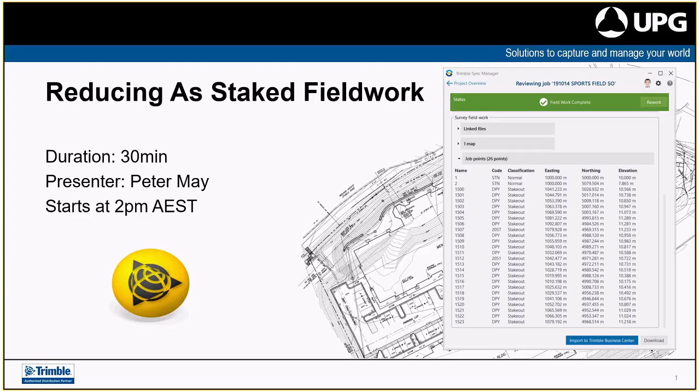So what I'll do is bring TBC up and then TSM on top of it. This is our survey or design data that we were to use to go and set out some sports fields.

I'll turn the surface off. So there's our sports fields. We're asked to go and set out the corners to about 25-30 mil, so we're placing dumpy stakes just to show where the corner should be for some line markings.

At the same time, we did a little bit of a rough design stakeout to see how everything would present when we bring it back into TBC.

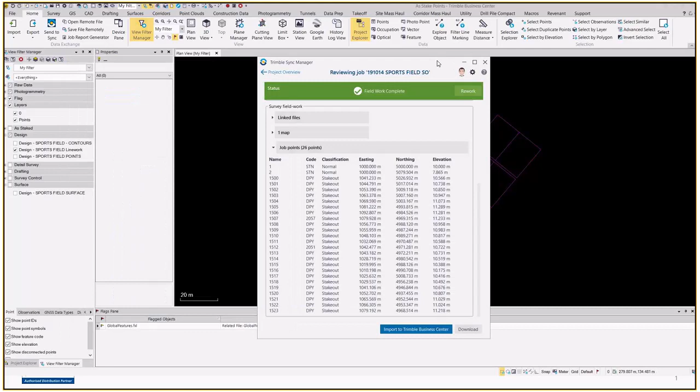So when you look at TSM, you have the ability to view your data, and this is what's presenting here - the link files, and if I scroll up, we have the job file, created on the 7th of November, with today's date as the date last modified.

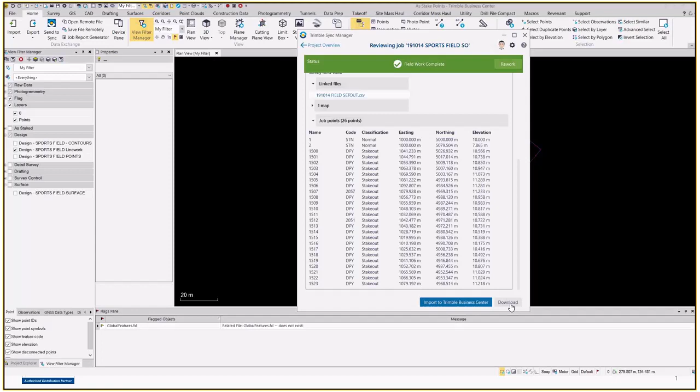What we're going to do is download the data from this and store it as a JXL, then drag and drop it into TBC, or in this case, you can just import straight to TBC from TSM.

So we're going to go ahead and do that, and a notification will come up in TBC asking what you'd like to do - would you like to import it, yes or no. We're going to go ahead and import the data into TBC.

So a standard request screen, or projection definition, will come up to provide some information on whether you want it on scale factor - for instance, if you just want it on ground scale factor, or if there's a grid scale factor you're working on for the project, this is a place where you can edit it.

This information is pulled from the .job or .jxl when the file is imported, so you can edit it now and it'll be stored against your JXL, or just leave it as is - that's what we used from the field.

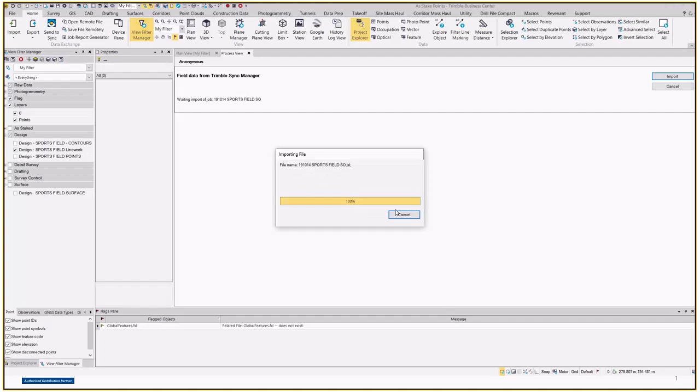So I click OK, import the data, and you'll see that it shows it's finished. We close this process view, and we'll see that we have a whole bunch of new points that have arrived on the screen. A red, or orange, flag is an as-staked point, and the as-staked points are shown up in your Project Explorer.

So it's not classed as a point; it has its own definition as being an as-staked point. These are the points that we set out, and then underneath each one of these is obviously the vector information from the total station.

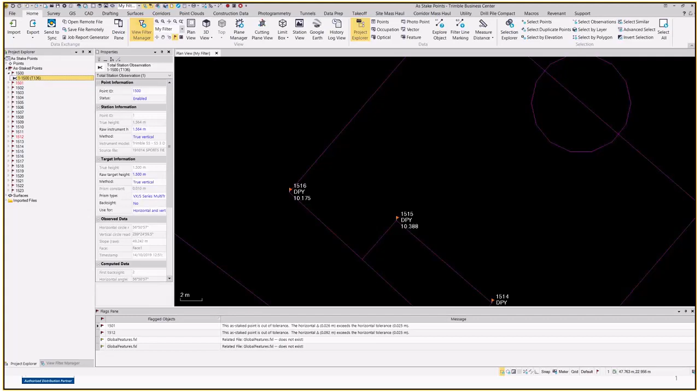For the process of this, I have turned off most of the other views and raw data information. So if I turn on total station, I've turned off all the total station observations, so we don't really need them.

Now, down the bottom of the screen, we have our flag pane. It can be found in the bottom right hand corner. You can turn it on and off. This will show you certain errors, and these are based against the settings that you set in your project settings.

In this case, we previously set a 25mm horizontal tolerance for all points and as-staked points when it came in. There's two that sit outside that: one that's at 282mm, obviously a blunder, and then one at 26, which is obviously a little bit rough.

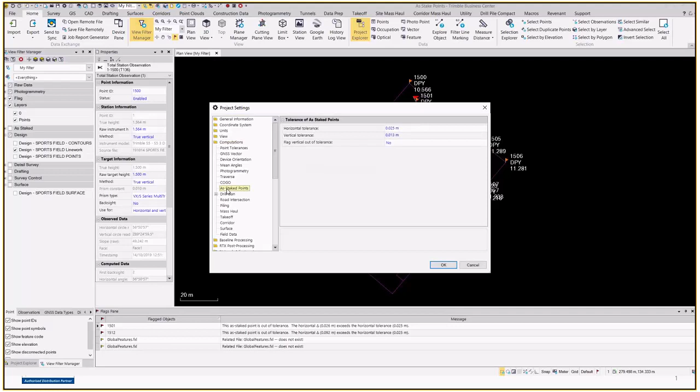So I'll just show you where you go. On your quick access toolbar, up in the top left-hand corner, we're going to go to project settings, and we are going to have a look at computations, as-staked points, and this will be where you find your tolerances.

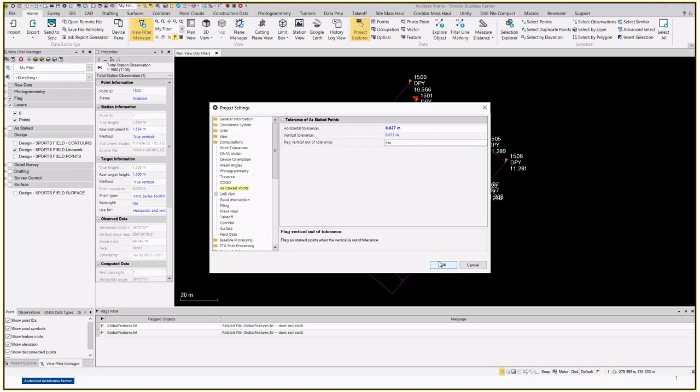So we can blow this out, say 27mm in this case. Do we want to test it against the vertical? No, we don't, because the verticals are all wayward. I made sure that they were all a bit iffy, just so I could show you something else in one of the next steps. If you click OK, that other point has now disappeared.

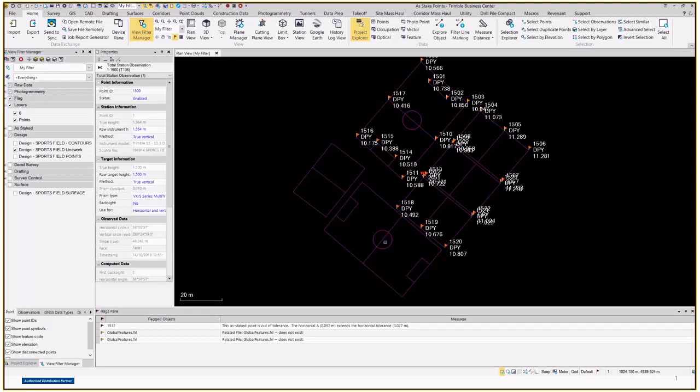The flag's disappeared, and there's still one that's there. So that's the flags. Now, when data gets brought into TBC straight from a JXL, the points are actually stored in the points layer. So if I isolate your layers and then go to points, you'll see that all these points have just been imported, and they're just sitting here under points.

Now, horses for courses and how people want to do this. Some people prefer to keep them in there. Some people like to segregate them out and throw them somewhere else. I myself love to keep things in different layers related to different days, so that I know when it was done and who did it.

So I'm actually going to go through and rename and relayer all those objects. And recently I found a really nifty little command in TBC which will allow me to do that in one swift hit, and it's called relayer objects.

Now you can, if you wanted to, select all those objects and go through and change them in your properties under points, vice versa, but this new command allows me to create a shortcut to do it in one easy swift hit, and you can do it to multiple things and vice versa.

One way to find it, and for those who weren't at this morning's session about data prep, you're able to find this through your command pane. Now the command pane is located in your quick access toolbar, or if you wanted to, you can press F12 and that'll bring up the command pane.

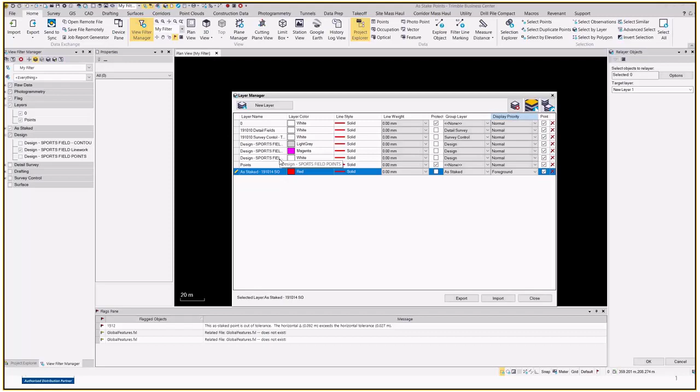You can set priority and how it's to be displayed on the screen in relation to all the other data that's presented. So in this case, I want this to be in the foreground because it'll be up against some other set out information or some other design information when we look at that later on.

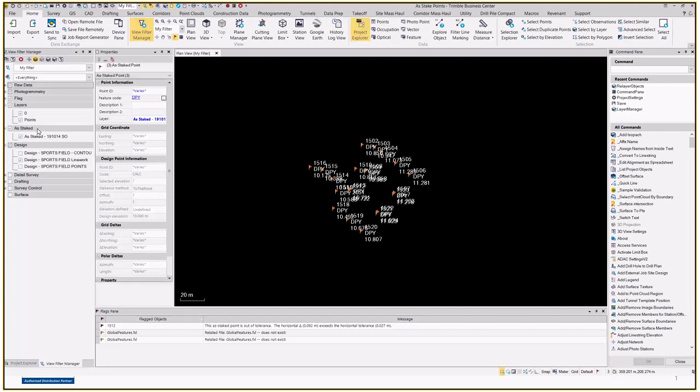Okay, so there's my layer, it's good to go. What I'm going to do is select a couple of points for this exercise, just a couple up in the top left-hand corner, so 3 objects, and I'll click OK. Now it's thrown those into a brand new layer, as staked here, where I've created those 3.

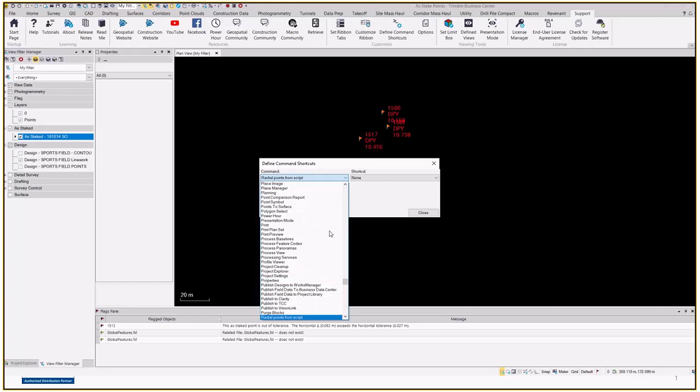Now I can go back through, type that command back in to relayer, or go to recent commands and go through that, or I can create a shortcut. I'll show you how to do that quickly. Quick shortcut, define commands, and we're going to look quickly for relayer objects, relayer objects, and then we can assign a shortcut to it.

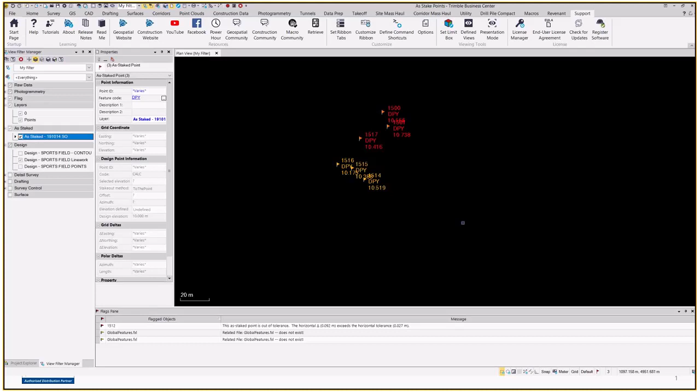In this case, I've created Control L as my shortcut. So if I go back to my points, just a quick note, if you use this command again straight after using it, it will actually hold that layer you preset before. So if I select 3 points again and go Control L, it'll automatically throw those 3 points into that layer, making it nice and easy to get around. So it's something you can use not just for this, but for other things as well.

I just thought I'd throw that in there for today's little exercise. So I'll just throw all this stuff into the one layer, and there it is. Everything's now in as staked from today. All right, so there's our data.

We now want to go and have a look and see how good our surveyor actually was, or how good I was when I did the survey. So we'll want to look at this as a report form. You can go into a couple of other spaces and look at some data if you wanted to go through Total Station Editor and look at the observations stored, but it's actually much easier to go through your reports.

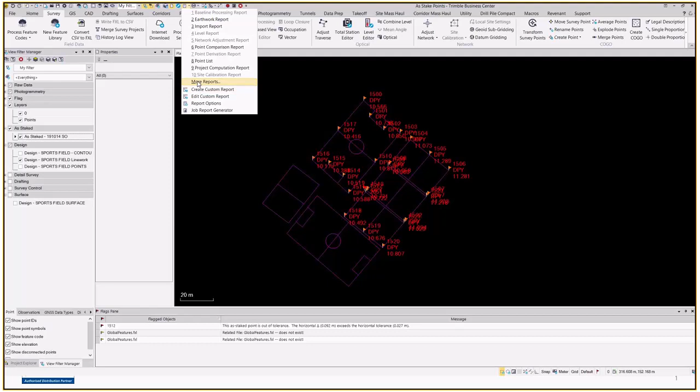So again, in the quick access toolbar, between the printer and the edit button, there's a reports tab. Click on the drop down and there's a whole bunch of reports listed in here. If we go to more reports, a new dialog will pop up, and then we can view an as staked report and look at all the points that were as staked. So I'll wait for this to load.

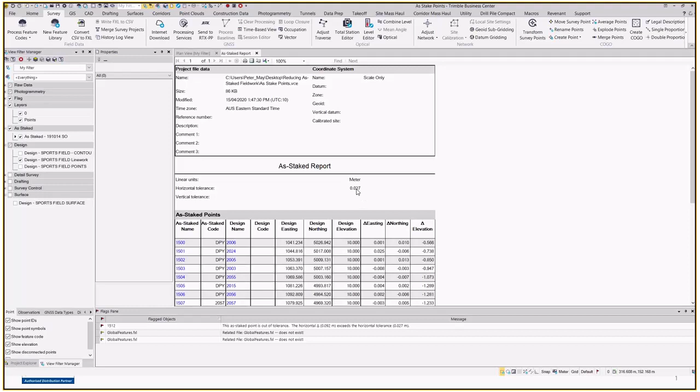All right, so we've brought up the as staked report, header, a whole bunch of information. If we had a coordinate system, all that'll be listed in there. These descriptions and comments and reference information are set up in your project settings if you ever wanted to do that—that's something that might be of interest. Because we're not looking at a horizontal tolerance—vertical tolerance, sorry—nothing's presented here, but obviously our 27 millimeters is being shown there. And at the same time, it's also showing all our other information from the stakeout.

So, design easting, design northing, your design elevation. In this case, for most of the survey, I actually entered this into the survey so that I wasn't measuring against a TTM or anything like that. And then obviously it provides your deltas and then your cut and fill relative to those design elevations there.

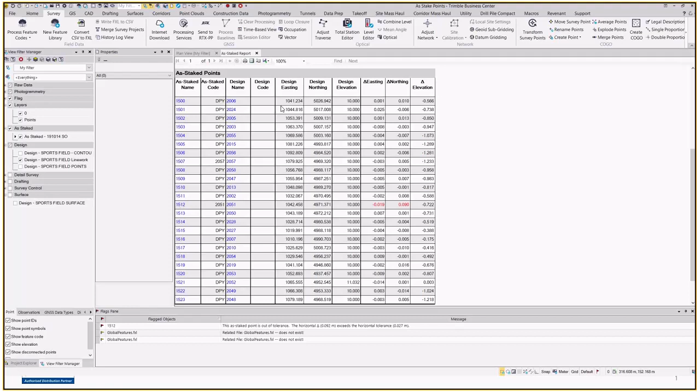So this is our wayward point. It also looks like we've miscoded it in the field as well. So one way of going through and editing it is we can throw this across to the other side and have 2 concurrent views running. We can click point 1512 and it'll zoom in and highlight that point for us. We can then have a look and, okay, well, there is a feature code that's wrong. It was a dumpy, so I can recode my dumpy point.

What am I going to do about it being 90 mil out? I can look at disabling the point, or I can then offset it, for instance, to the line, and there's a couple of other different ways of doing that in drafting. So that's how you go through and edit any other blunders or anything else that we need to look at in here.

I think there's 1512 and 1507 as well. So if I click 1507 and zoom out - 1507, no, where's 1507? There you are. And then 1507 also has another bung point, so just edit that.

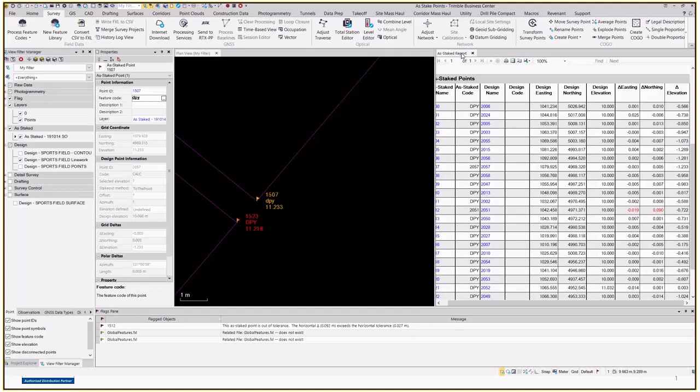And done, okay, so that's a report. You can save that, export it out as PDF, Word, whatever you want. You can dress it up however you would like it to be presented. If that's something you want to keep for your QA process, that's up to you. So I'm going to close that now, don't really need to look at it anymore.

So we have our points, and we've had a look at our reports, and probably the next best thing is to see how we go with doing a little bit of drafting and turn this into an actual usable plan.

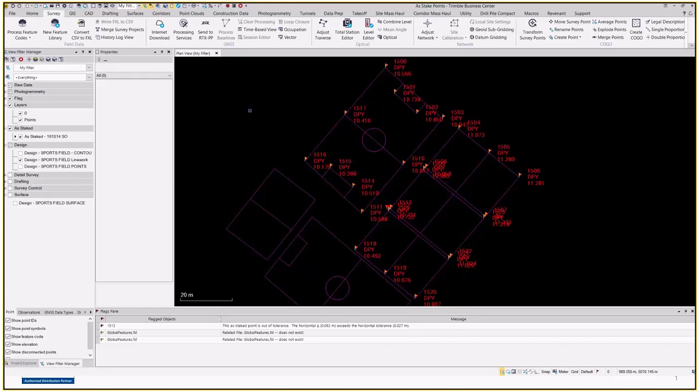These points presented on the screen, we can leave them as 'as staked' points. You can also convert them across if you wanted to change them into normal points, but it's horses for courses. I myself just leave them as 'as staked' points. Some people like to change them, transfer them over, and remove the linkage and all sorts of things, but in this case I'll just leave it all as is.

So we want to present a set out sketch, and in the set out sketch we have a circle for the symbol and some text, so probably a code and an elevation that was stored at the time.

This is done through your drafting tab, and you can go through and pre-set up your templates. I'm sure there's a video floating around from the last couple of weeks on creation of templates, text styles, and drafting, but this would be another quickie to have a squiz at.

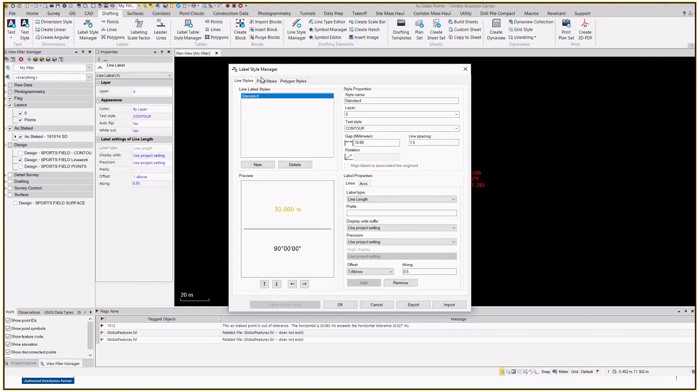So in our label style manager, this is how we would go about setting up our label styles for any of our points, lines and polygons.

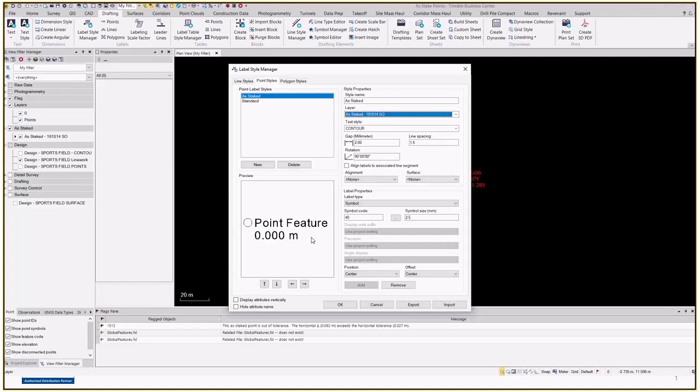For our point style, I've already created one called 'as staked', and it's embedded into the template - as staked, and as to what layer it's to be presented in. For instance, we can change that to go into today's date, or into the survey layer. I've also created a symbol, just a circle, to be presented in red, point feature code, and then an RL added in there as well.

So we can isolate out our data if you want to view it physically - for instance, select the whole bunch and click point label, add a point label style for these points. When you go through point label style, you can click the drop down and choose which one you want. So I'm going to get 'staked', it automatically pre-filled the layer. There's 9 points selected, and I click add, and it goes through and converts those points into symbols that can then be used on our plan.

At the moment, I've got this text style set up so that the text will be set to 2.5 millimeters on the plan sheet. So this text will vary depending upon the scale preset in my project settings. I think at the moment it's set to about 600, and I'll go back through in a minute and change that once I've looked at what scale I'll probably get my plan sheet at.

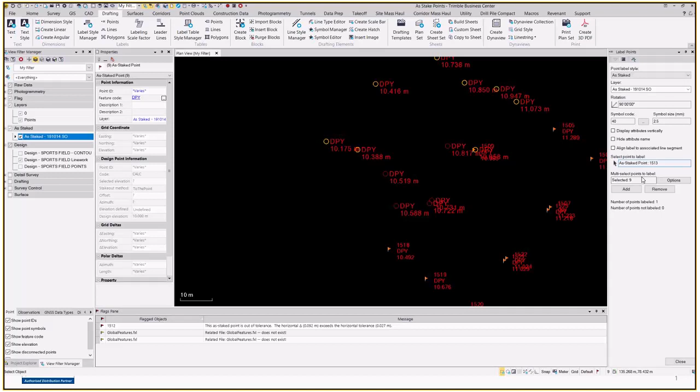Going back to labeling points, you can physically go through and select one at a time if you wanted to, and go about that, or you can just select all of them and convert them all into one. So there we go, all of our text has been presented on the plan.

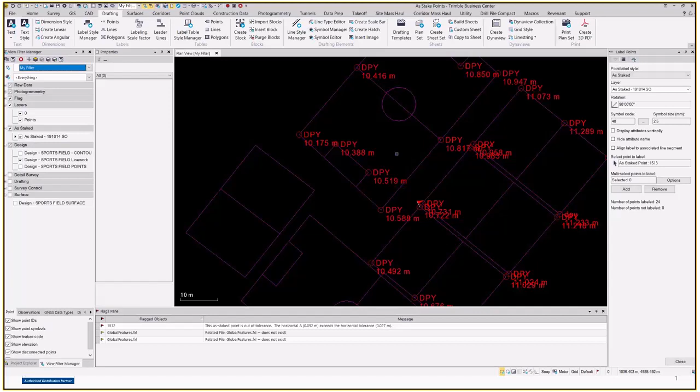We unisolate our layers - there's our sports fields. Let's go and have a quick look at our settings for our scale. So we go project settings and have a quick squiz.

We go to view and into plan views. Plan views is where, if you're creating a plan view sheet, the plan view plot scale will be what this is based off. So if you are using a cross-section view it will have a different scale, and you can preset that in here as well.

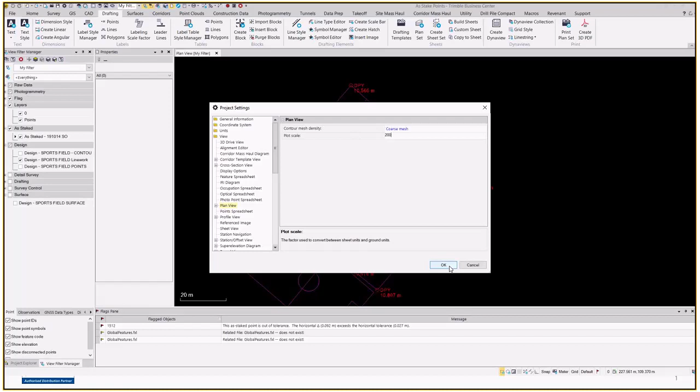Just for this, we're doing a plan view, and I'm going to set it to about 200 because I'm going to present it on about an A1 sheet. That'll automatically change my text and my symbol size as well relative to the sheet.

If you've got these things set up already in your FXL or in your template, a lot of times you can just quickly drag and drop your stake data in, have it up, and then quickly output it to your sheet, and send it out either off to drafting if you really want to, or if you've got your plan sets set up correctly with all your title block and all your disclaimers and everything pre-done, then all you've got to do is just go straight to plan sheets, print a PDF, send to the customer.

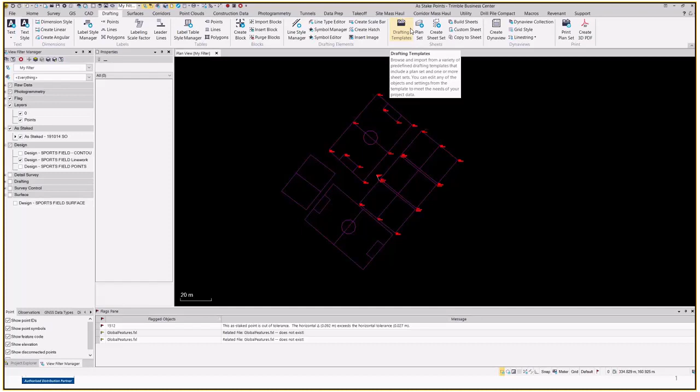So let's go and quickly throw it and show you how easy it is to throw it to a sheet. We're going to go straight to a drafting template. I'm just going to use an A1 plan set that comes vanilla with TBC, and you drag and drop it into your plan view.

Again, this can be preset, already part of your template, and it will be presented and part of your plan sets in your Project Explorer. So I will have a quick squiz at some information that's already preset in these plans.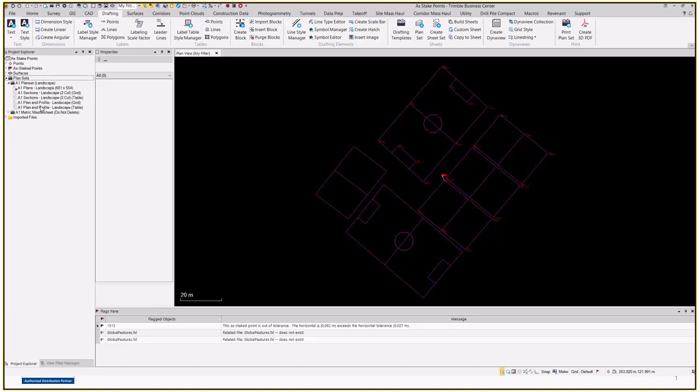If I right click on this and I want to look at a new sheet view, this is the Trimble plan that comes with TBC. You can go through and edit a lot of this information. A lot of this is smart text, and I'm sure that'll be covered in another drafting seminar at some other stage.

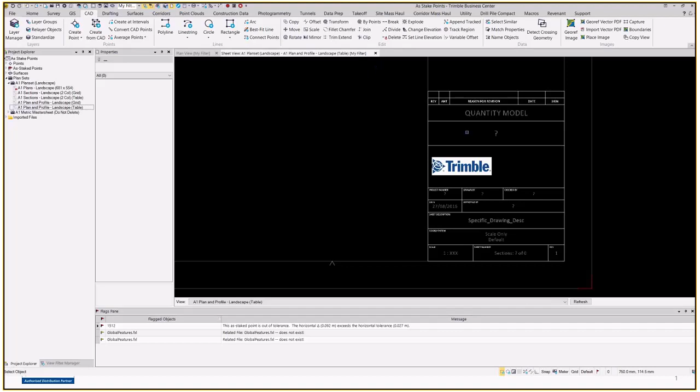The smart text can be pulled again from your project settings, and all this is creatable straight from your project settings. You don't have to pre-fill any of this. You can have it done in your project settings and then send straight to plan set.

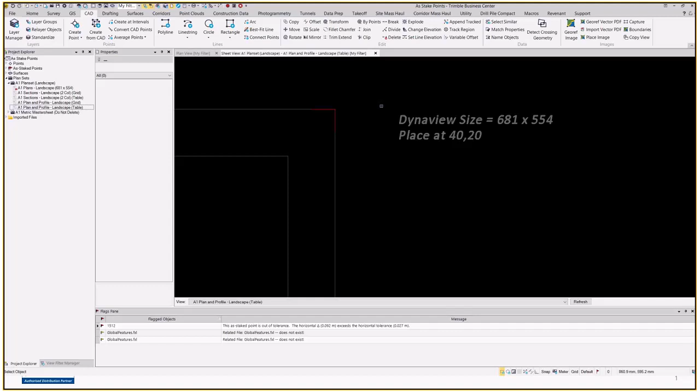But on the top right hand corner, we have some information that we need for creating our Dyna views and sending our data. Dyna views is very similar to a viewport in AutoCAD and the Autodesk world. In the Dyna view here, we will have this information and it'll help us create our Dyna view and then place it on the sheet when we go and place it.

We want to make sure that it's 681 by 554 is the Dynaview size, and then we're going to place it at those coordinates from the bottom left hand corner when we import the Dyna view. So I can close that now, don't really care about that anymore.

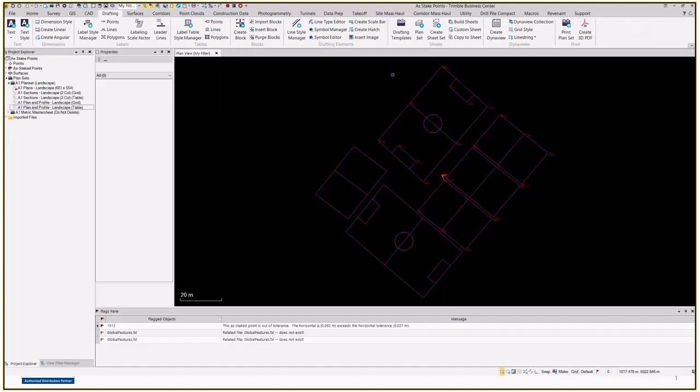Let's go back to drafting, and we're going to create a Dynaview collection. I'm going to call it As Staked.

Now our page width, that's those numbers that we were looking at before, the 681 by 554. So we then change this to 681 and 554. Plot scale again gets pulled straight from your project settings and is pre-filled, and that's set in there. Now we can change the number of Dyna views or view sheets that we have.

In this case, I only want one, so I've set it by 1 by 1. You can have it as a 2 by 2, and it'll create 2 by 2 with overlap of 20 mil as a column, or have 2 columns and 1 row. But I'll just have it set to 1. That's all I need for this job. Don't really care about anything else here.

And then when you load in your plan set, there's a whole bunch of layers that are automatically brought in with all that information as well. So these here are all the plan set layers when they get imported, and we can then assign them to, for instance, the Dyna view box.

Now, the first sheet origin, that'll be the placement, the position of your Dyna view. So for instance, I'm going to place it like that, and you can rotate your Dyna view as need be.

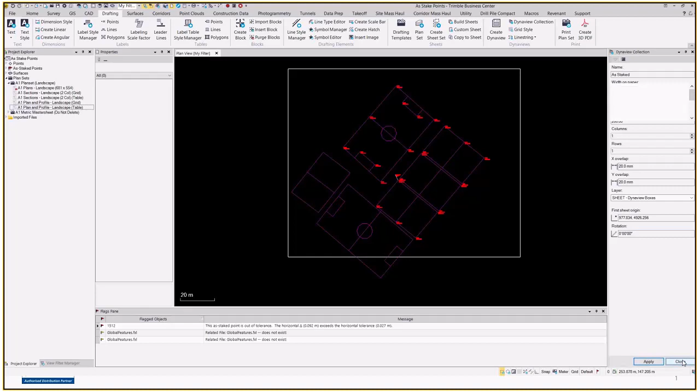The box itself is again thrown into its sheet Dyna view layer. You can switch all that off so you don't have to see it later on. And then in your groupings, you can set your groupings and internal groupings for sheets and that sort of stuff off as needed. You can, if you really wanted to, change your Dyna view relative to what day you're doing, what survey, and so on.

Okay, now we're going to go and create our sheet sets. If we go to create sheet sets, we click the drop down. When we imported that plan set, A1 plan set, two sheet sets brought in, metric master sheet and plan set 1. I'll use that plan set A1.

I'm going to call my new set 'staked', and it's going to be 191014 set out. My actual sheet set type will give us a definition of whether we want it to be a plan grid, profile, or custom.

So we want it to be plan grid, as in top down, looking at the horizontal plane. Orientation, we want it to be in landscape. And then this is where we have our sheet width information. I'll just leave that as is. And then here we have our offsets.

Those offsets were the values 40 and 20, which are those coordinates for the Dynaview placement. Now the view filter - the view filter at the moment is set to my filter. So if I select all, it'll show everything that I've got in there. I don't really want to see everything, I want to make sure my view filter is set to my filter, and I've cleaned it back.

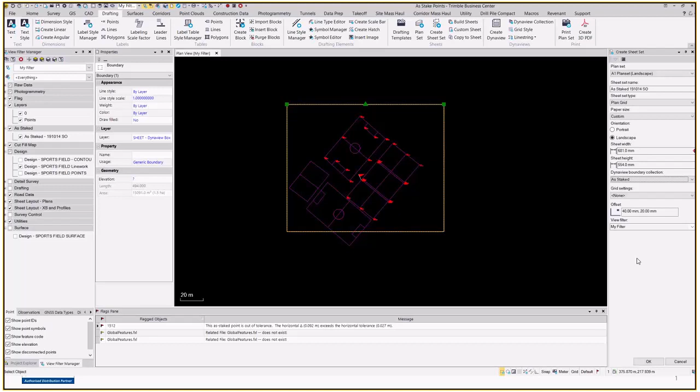So I'm going to drop that down to my filter, and then click OK. Sheet width 681 by 554, and then click OK. If I go back to my Project Explorer, I'll have a new sheet set that's been created, with sheet 1 being the one sheet that was set in when I did the original Dynaview.

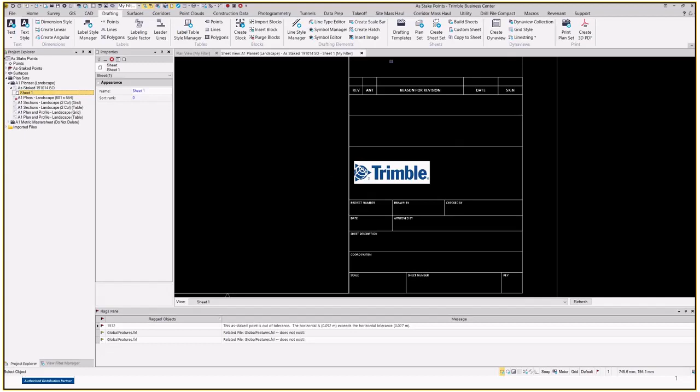So I want to view that, go new sheet view, and there we have it - our sheet view set up in our title block. Again, none of that information is pre-filled because I don't actually have anything set up in my Project Explorer, but say I did, I could pre-fill project number, description, drawings, and so on. And then you can import other blocks and whatever else.

For this, you can export this straight to a PDF, straight from here, and then have that presented however you want.